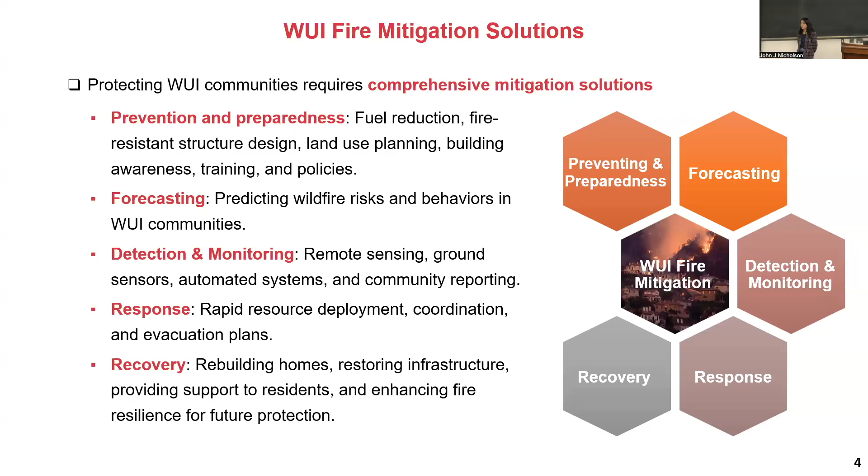While my research is focused, because it's a big problem, my research is just a small part of this problem. My research focuses on what physical and environmental factors control ignition and fire spread in dense wildland-urban interface neighborhoods — for example, how a building's features or environmental features make one building more easily ignited or less combustible.

The second part is how we can model, predict, and ultimately prevent structural loss in future wildfire disasters. For example, we study different types of window systems to see which can prevent the window from becoming an opening — once the window breaks, it creates an opening that lets embers enter the building. So we study different window systems to find the best one for wildland-urban interface fire scenarios.

The last part is how we develop the fragility curve for structures in wildland-urban interface communities. The fragility curve basically tells you the level of fire hazard and the probability of a building reaching different damage levels.

We currently develop this fragility curve mainly based on survey data. But survey data has a lot of missing data — for different buildings it's often not complete. So we also leverage simulation and experimental data. That's the three parts of my work: we cover simulation a little, experiments, and most of my work is experiments.

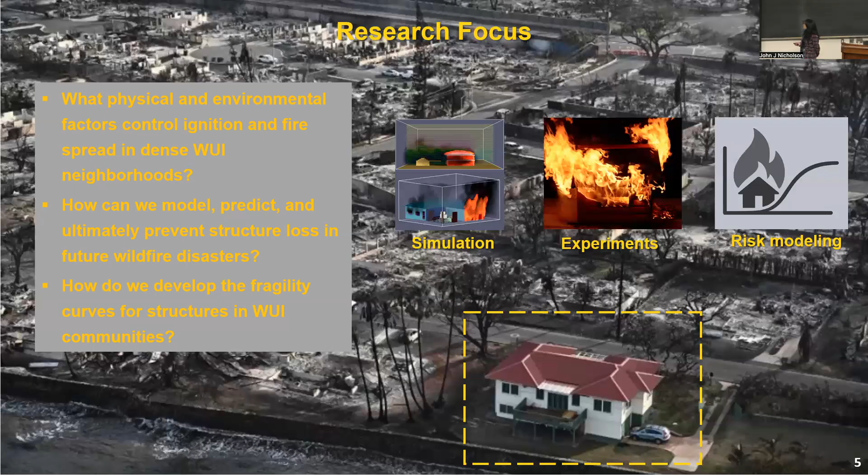The first part of my work involves an NSF project trying to explore the feasibility of using high-resolution CFD-based simulation to model structure burning and inter-structure fire spread. It's high resolution, not high fidelity. The model mainly uses the Fire Dynamics Simulator software, designed by NIST, which is specifically for fire research and is LES and CFD based.

The reason we want to develop this high-resolution model that can simulate a structure burning is because experimental tests of burning one structure are very expensive and time-consuming. We can only study a couple of different scenarios — we cannot use experiments to explore different building configurations.

You have different roof systems, different siding materials, decking materials, window systems. There's no way to do all these types of tests to tell you how to optimize your building design. So we want to use FDS as a tool to see whether it can model structure burning well.

Most current FDS simulations focus on compartment fires or external fires — for example, unenclosed fire. A compartment fire is, say, if I have a fire in the corner of a room, how does the fire spread in this room, from the initial stage to flashover to the decay phase. This is a compartment fire — it doesn't involve the enclosure itself.

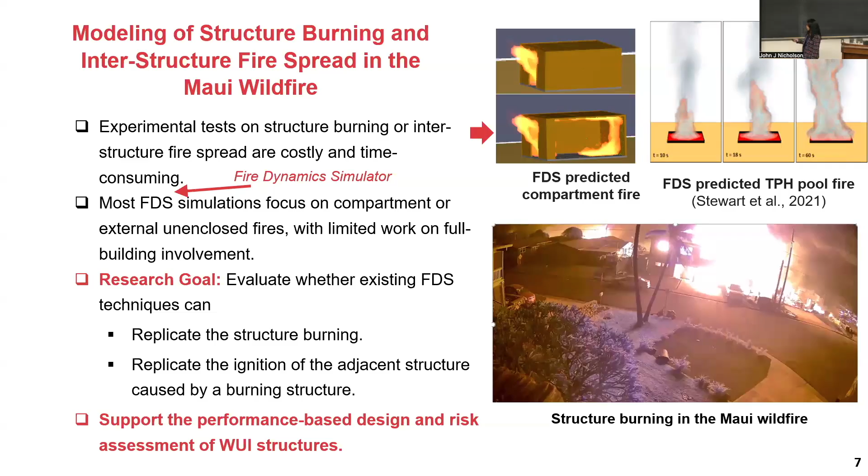So the structure we selected to replicate is the two buildings in the Maui wildfire, and this is a source structure which was burned in the wildfire, and the burning of this structure ignited a one-story building. We selected this neighborhood because we have data from cameras recording the whole burning process of these two buildings, so we can use it to calibrate or evaluate our models.

If you look at the space between the two buildings, there's some trees, some vegetation, and this vegetation impacts a lot the fire spread from the right building to the left building. Also, in the simulation computation domain, we're including another structure, just to account for the potential turbulence caused by this additional structure.

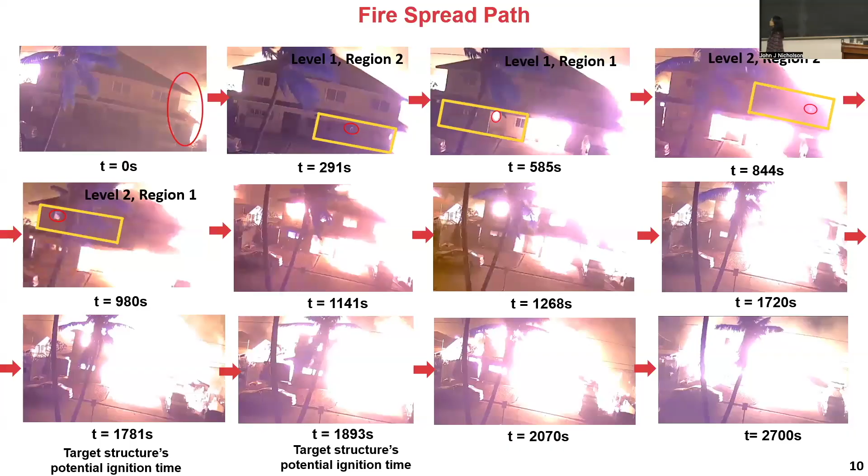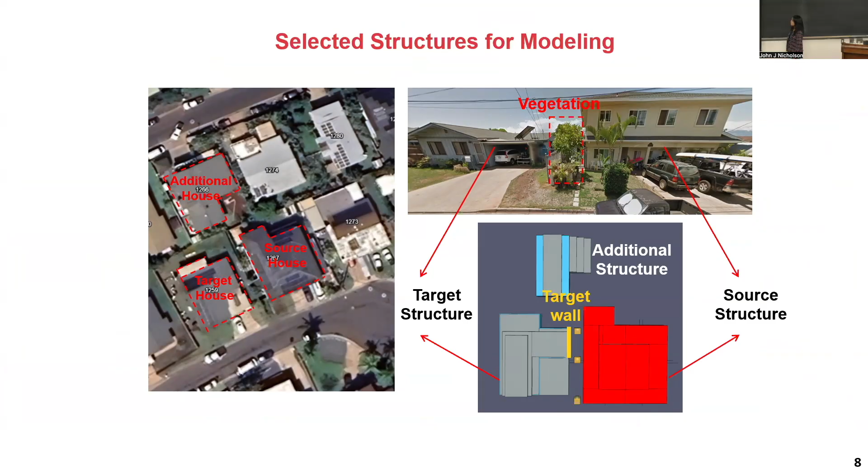The reason we also selected this area is because this building, the one-story building, is ignited by flame impingement rather than ember. Because FDS currently is unable to simulate ember generation, that's why we try to avoid the ember problem in this simulation.

So here, this slide shows you how we model the burning behavior of the source structure. It's a two-story building, the red one, the source structure. In research, we can develop a very high fidelity model. For example, we can develop the model and apply the pyrolysis model for different types of construction material. So we heat the material, it starts the pyrolysis process and emits a lot of combustible gas, then meets the oxygen and the burning happens.

We can simulate this process, but it's very high fidelity and the computation cost is very expensive. That's why we try to simplify the model. Rather than defining the material pyrolysis in detail, we calculate the fire load in each room, and we also count the fire load from the enclosure because the walls are wood walls, so we consider the different fire loads. Then we assign this fire load as a burner to the enclosure of the building, considering the fire in the different stories, and also the fire load in the roof and overhang. Here, in the first story, there's an overhang, so we try to consider the different parts.

So we apply those fire loads as a burner at the surface. For this burner, we define it according to the fire curve calculation, and we can figure out what's the heat release curve. There's some simplified equations to help us.

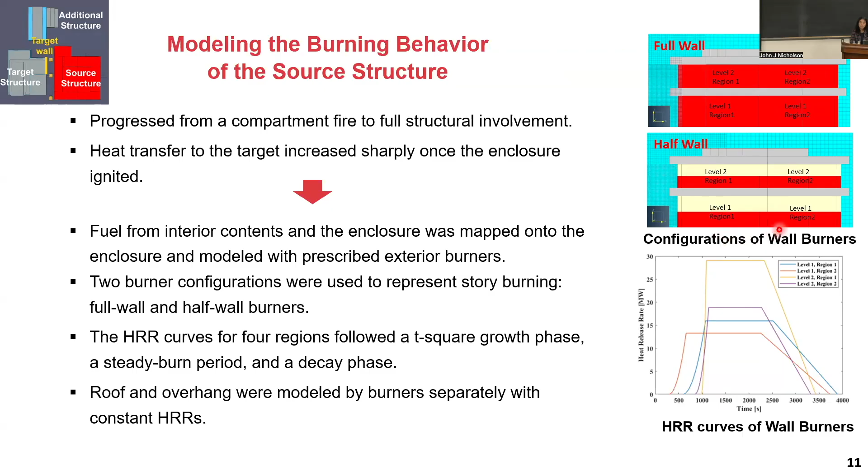So we figure out the different regions, the fire burners, the heat release curve, and then uniformly distribute the fire heat release curve to those enclosures to see how it works. We investigate two different configurations of the burner: in one, we apply the burner to the entire height of each story, and in the other, just half the height of each story.

We also model the vegetation, using a relatively high fidelity model. We consider the material starting from the timber, the wood, and the foliage or leaf, which we treat as wood material. In reality, the tree is a plumeria tree, which is relatively popular in Lahaina. We were unable to find a material pyrolysis model for this type of tree, but in the FDS validation examples there's a Douglas fir pyrolysis model, and usually the pyrolysis model for different materials doesn't differ much.

Maybe the ignition temperature is somewhat different, but we used the Douglas fir's pyrolysis data to define each particle. The tree was modeled as a lot of particles, representing the trunk, branches, and leaves, and then we applied the material pyrolysis model. Once you define the material pyrolysis model, it's basically a chemical reaction, a multiple-step chemical reaction. That's how we modeled the tree.

This model was not developed by ourselves. In the FDS validation examples, they already used a similar technique to model the burning of a couple of trees, validated with their experimental data, and it works very well.

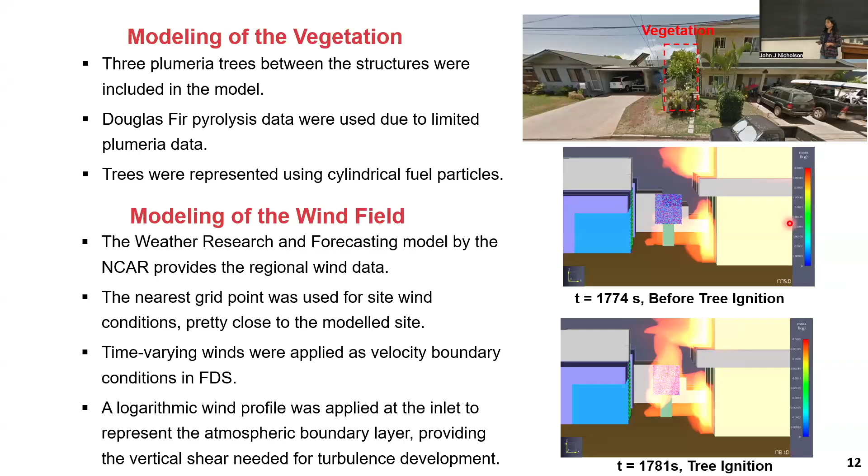So here I show you a couple of comparisons with our simulation. We can simulate those critical events, how the tree burned and how the flame changed direction as the fire developed, but overall the fire size in the model is a little smaller than in the video. Also, the information captured by the camera, because of smoke and other factors, doesn't represent the real fire size, so there's some inconsistency as well.

In this model, for the target structure burning, we stopped the simulation at the point when the target wall was ignited. Once the target wall ignited, we didn't simulate the fire spread within this structure, which is our current work. We basically replicated the burning of this structure to see whether it could ignite the next building. That's the start of inter-structure fire spread.

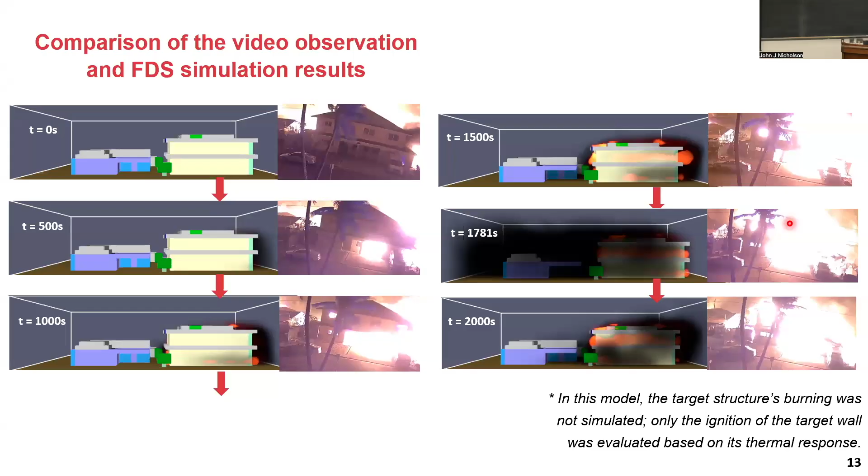There's some ignition time analysis. This slide shows some ignition time compared to the video observation. So the ignition time is, basically we monitor the target wall of the one-story building's surface temperature and incident heat flux. We put a lot of sensors there, calculated the average temperature, and also checked the maximum temperature history.

We get the results from two different types of burner configurations. We found that in most scenarios, the heat flux and temperature from the half-wall burner is higher than the full burner configuration. We also found that the fire started very dramatically, and the heat flux reason is because the fire, even in the burner setup, has a growth phase, a steady phase, and a decay phase.

So during the burning of the source structure, what we see here is the thermal response of the target wall. We found that no matter whether you're using the half-wall or full-wall burner configuration, there's a rapid increase in the surface temperature or incident heat flux at 750 seconds, and the value becomes stabilized starting at 1,100 seconds, then as the fire grows further, it will definitely decay ultimately.

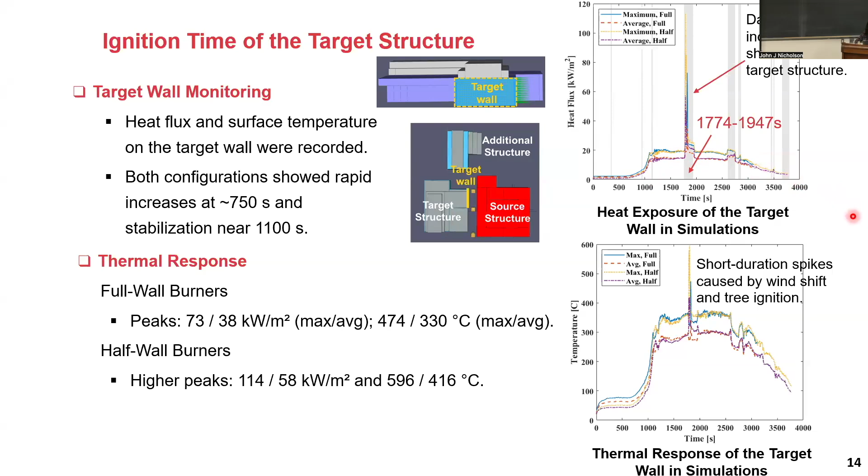So when you try to figure out when the target wall was ignited, you have to have some ignition criteria, which usually is the ignition temperature for the materials. For the one-story building, the target wall here uses plywood. The plywood's ignition temperature varies a lot, and it also depends on whether the ignition is piloted ignition or auto ignition.

So auto ignition, there's no spark there, right? If I was using a candle to ignite the wood, it's called piloted ignition. But if I just heat it and nothing touches the surface, it's called auto ignition. Usually piloted ignition has a relatively low ignition temperature.

For plywood, it ranges from 290 to 390 degrees C, while auto ignition temperature is 475 to 620 degrees C. And if this is a large-scale ignition, we don't know exactly what the ignition temperature is for the wood used for this building. So based on this different ignition temperature, we can identify different predicted ignition timing.

So we basically monitor the temperature of the surface and compare it to the ignition temperature of the material itself, to identify when the ignition of this target wall happens. Because of the large range of the ignition temperature, the predicted ignition time also has a relatively large range.

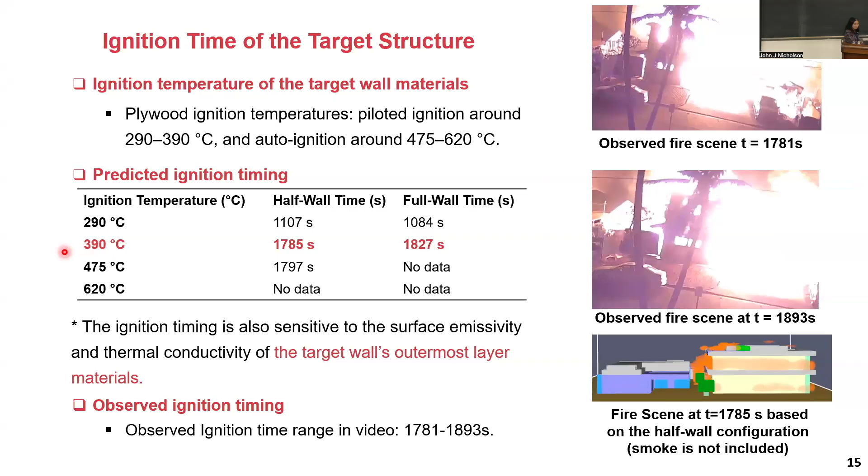So here we also study a little bit about the interaction between wind and vegetation effects. At 1774 seconds, the wind changes its direction, so it directs the flame towards the trees. Then the tree was ignited at 1781 seconds, and the vegetation ignition ultimately caused a very sharp heat flux spike. At this point, the tree was burned, and because the tree is so close to the target wall, the target wall was exposed to a large heat flux. That's the spike. And also, we compare the scenarios.

That's why in the mitigation strategy for wildfire, for your structure, you have to clean the vegetation around your structure, and make sure the space between the structure is enough.

So the problem is, what we found is we compare if the tree is not there versus the scenario with the tree. The blue one is no tree, the orange one is with tree. I compare the different average heat flux and maximum heat flux. What we found is if there's no tree, the spike is relatively small compared to the scenario with the tree. If you compare no tree and with tree, the spike is much smaller if there's no tree.

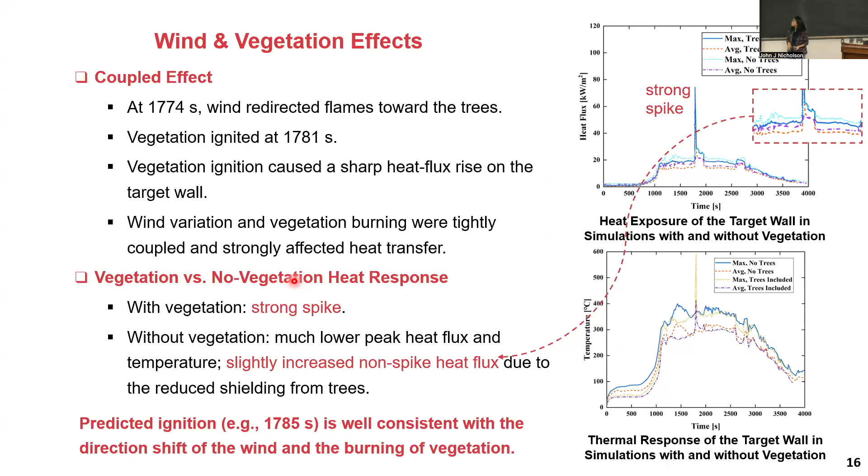So here I'm talking a little bit about the current limitations of the current modeling. If we look at the two-story building burning, we can observe structure collapse during the whole process. When the structure collapses, it changes the fire dynamics significantly and also changes the spread. For example, when part of the structure collapses, it generates a large opening, and this large opening changes the ventilation condition significantly, and also spreads part of the structure.

Let's say if the first story is able to contain the fire, it can prevent the fire spread from one story to another. But if your floor system collapses, once it's collapsed, your compartmentalization has failed, so it accelerates the fire spread.

So current FDS is unable to incorporate structure collapse, because structure collapse is a lot related to mechanics - you need a finite element to simulate how the structure collapses, or figure out a simple way to activate the structure collapse. So this kind of model is unable to capture the structure collapse, and it's also unable to capture the impact of structure collapse on the fire dynamics.

Also, in our simulation, we basically put the burner on the enclosure directly, and all the burning is from the enclosure. But if you look at the video, the fire started as a compartment fire - a room fire first, then spread inside the building, and then involved the whole structure. So FDS is unable to simulate that transition, but you can definitely put your burner inside, putting some burner in your enclosure.

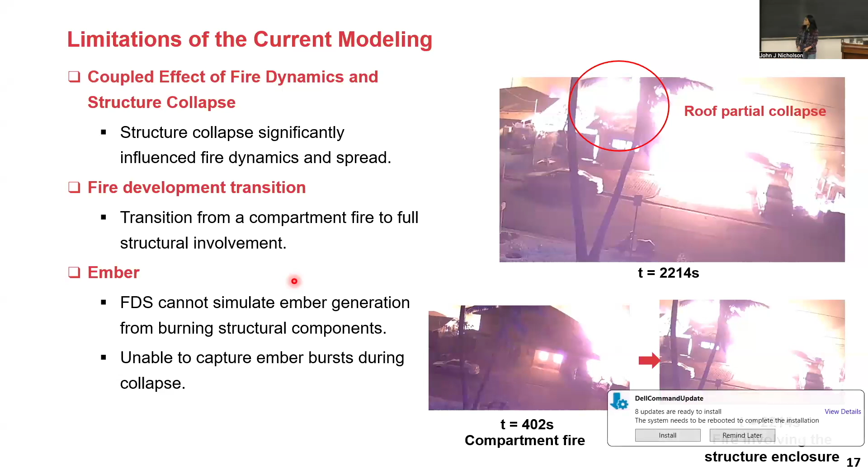So based on our simulation, we found that the reason we stop our simulation at the ignition point is also because we are unable to predict the structure collapse. Once the structure collapses, the fire becomes very intense. Because we're unable to simulate this pattern, we're definitely unable to simulate the fire dynamics. So that's why we designed some small experiments to see what's the fire-induced collapse of timber structure and its impact on fire dynamics. That's the next part I want to introduce.

Here's a brief introduction showing how fire impacts structure collapse. When the temperature increases, it basically causes the wood to char. It loses its strength and stiffness, reducing the load bearing capacity of a timber member, ultimately leading to structure collapse.

Also, the connection of each structure component will also fail. It can be nailed, but the nail is steel - under high temperatures, the nail will also fail. So connection degradation also accelerates the loss of structure integrity. Also, uneven burning creates differential deformation and instability, and failure of a key member triggers load redistribution and progressive collapse.

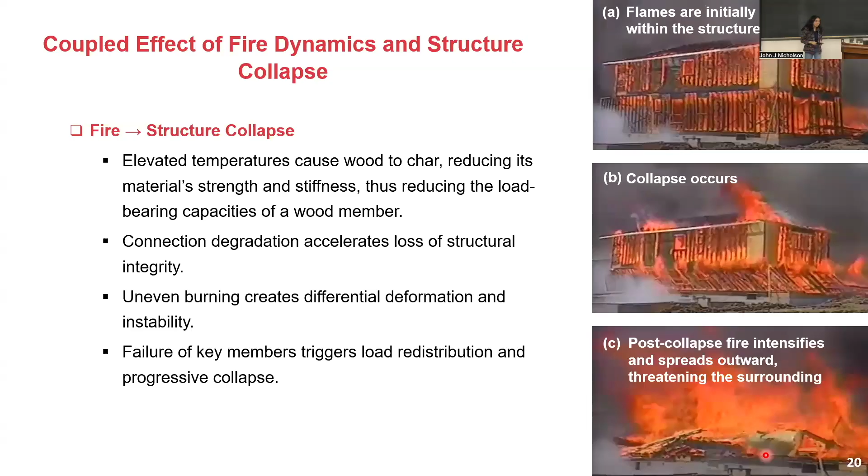The structure collapse also has some impact on fire dynamics. For example, it creates a new opening - part of your wall is failed, then it basically opens a large opening. This increases the oxygen supply and also releases hot gas. It also bridges the compartments.

I have some wall between two rooms, and this wall prevents fire spread from one room to another. Now the wall has collapsed, and it basically accelerates the fire spread, horizontally or vertically. Consider the ceiling failed - it accelerates the fire spread in the vertical direction.

Also it redistributes the fuel, exposing fresh combustible fuel surface to heat flux. Because when the structure component collapses, its location changes, and the burning structure member ignites the unburned surface, exposing fresh combustible material to heat flux. It also produces a sudden airflow surge, which intensifies burning and triggers reflaming.

You may already have some experience with barbecue - when the char is burning and you try to make the burning more intense, you can move the char a little bit so that the burning becomes more intense.

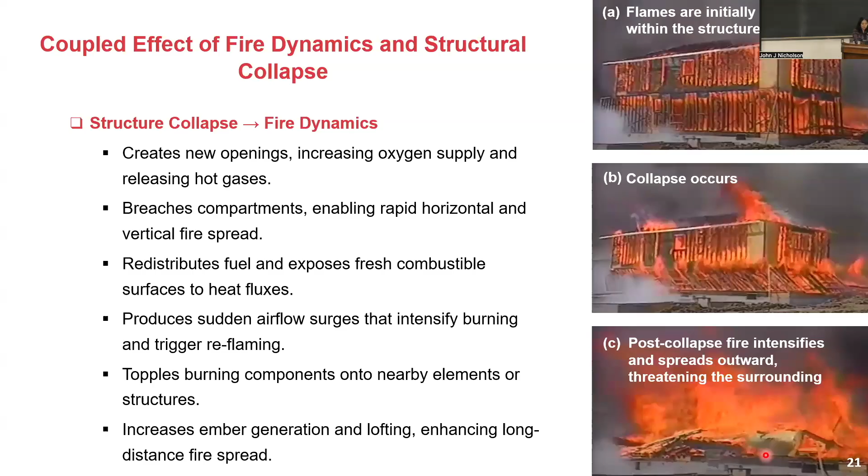This is what we observed from previous fire incidents, and we thought there's some coupled interaction between fire dynamics and structure collapse. Most current research either studies fire dynamics assuming the structure never collapses, or studies how the structure behaves under fire without considering that if the floor system has large deformation downward, it becomes closer to the fire source, making the distance between the structure and the fire source more enclosed.

In current research, the two phenomena are usually studied separately - only fire dynamics, or only how the structure behaves under relatively consistent fire. But in reality, the two have a lot of interaction: fire impacts structural response, and structural collapse impacts fire dynamics. So our experiments try to investigate the collapse behavior of timber structures and fire, and understand how structure collapse influences subsequent fire dynamics.

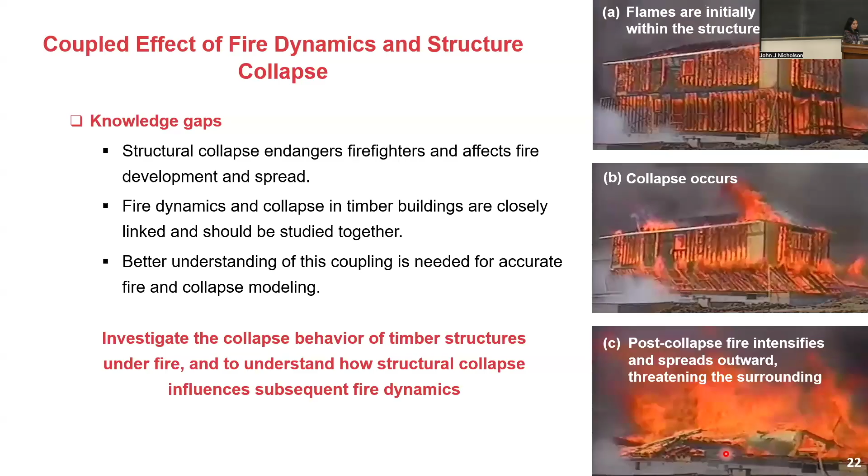We did couple scaled tests. We wanted to design a scaled structure, but my colleague told me designing one has a lot of components, is expensive, and time consuming. Home Depot has a lot of doghouses that give us the perfect size - we wanted to scale down a room by 1 to 3, and the doghouse gave us very similar dimensions we needed, and also a timber structure.

The structure type of a doghouse is different from wood frame construction - wood frame has a lot of small wood studs. But if you look at single family residential buildings, there's always a shed structure next to it used for storage, and that structure type is very close to the doghouse structure.

So we got the doghouse from Home Depot. In the original product, it only had a large opening at the front surface, but we wanted to make it more realistic, more like a building, so we created openings on all the other side walls, the rear wall and side walls. In the test we basically put an external wood crib fire to simulate the structure's behavior under an external fire.

So we have two wood cribs - the outside one simulates vegetation burning, and we also put a wood crib inside the compartment to simulate internal burning, representing fuel load from content like furniture, a couch, and a table. We ignited the fire outside to see how it spread from outside to inside, and put the wood crib at different locations to see how it changes the spread mechanism - that's the goal.

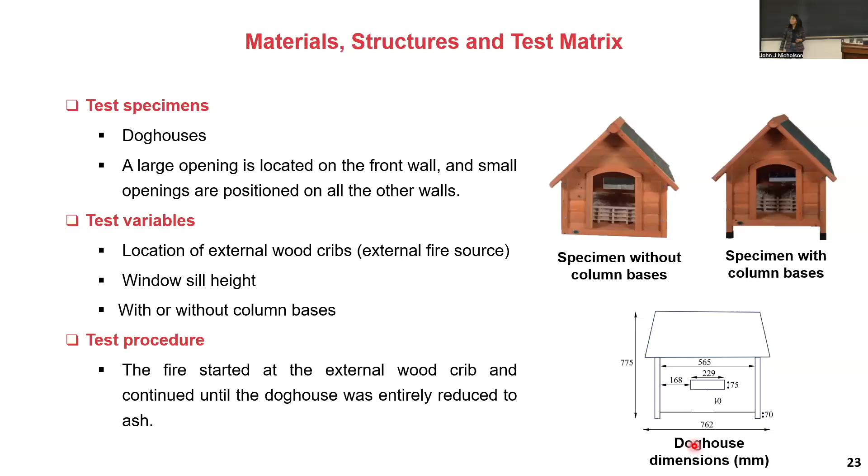This is the test setup in our burning room, and this is the test matrix. We used cameras to record fire development from different angles, and a load cell to measure mass loss, from which we can calculate heat release rate. Our burning room also has a hood that captures all the burning products, allowing us to calculate the heat release.

The problem is the fire for this one is we have two hoods. One is a 1.5 megawatt fire, which can go up to 5 more megawatts. It's almost a 6 feet by 6 feet compartment fire, a pretty large fire. There's another hood, only 600 kilowatts, relatively small. Our fire size is something in the middle.

Our large hood is unable to capture the heat release directly, so rather than use the hood to help us calculate heat release. We use the load cell to measure the mass loss, so we can calculate the heat release. Once you have mass loss, you multiply by the heat of combustion of the material. Most of the material is pine wood, so you can get the heat release.

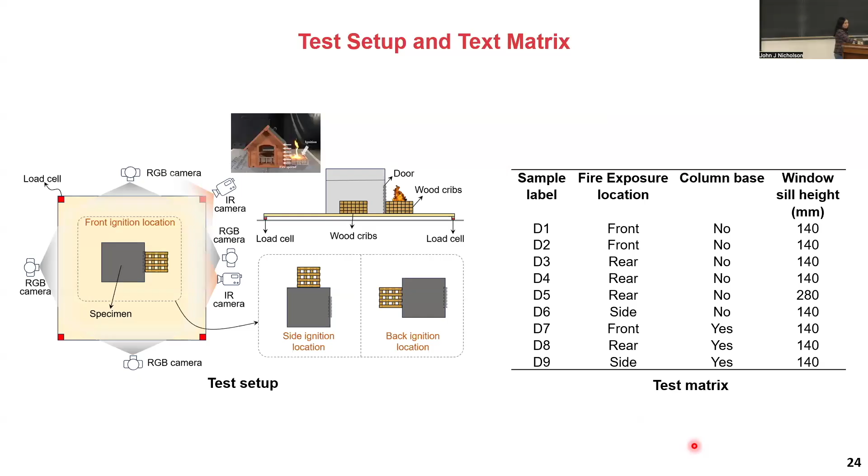So here's a couple of burning videos I can show you. This is the first one. The left one is the front fire exposure, where we put the wood crib in the front walls, and this one is the burning of the wood crib under the rear walls, the back walls. If you can see, the fire spread for the front fire scenario spreads from the external burning and ignites the internal wood crib directly, and then the fire develops very fast in the structure, involving the whole structure, ultimately collapse.

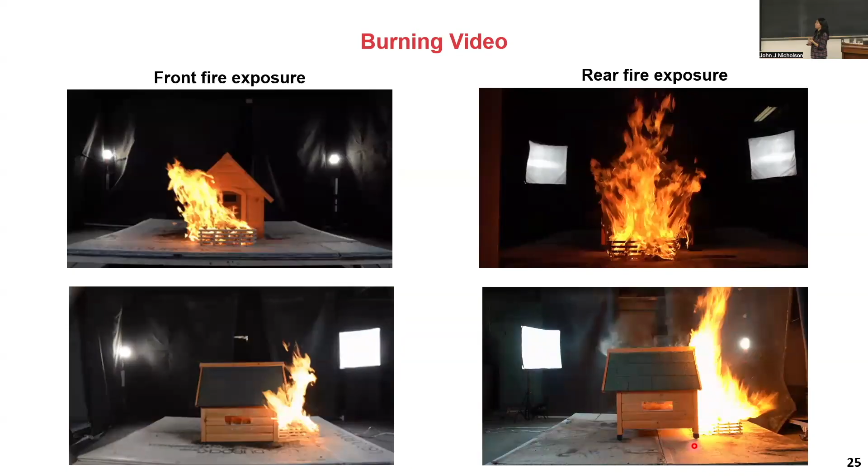But if you look at the rear wall scenario, it's different because the window is relatively small, so the fire was unable to spread directly to the room. It ignited the wall first, and the outside surface of the wall was burned first, then the wall burned through to the inside, and when the wall inside was burned, the burning of the wall ignited the internal wood crib.

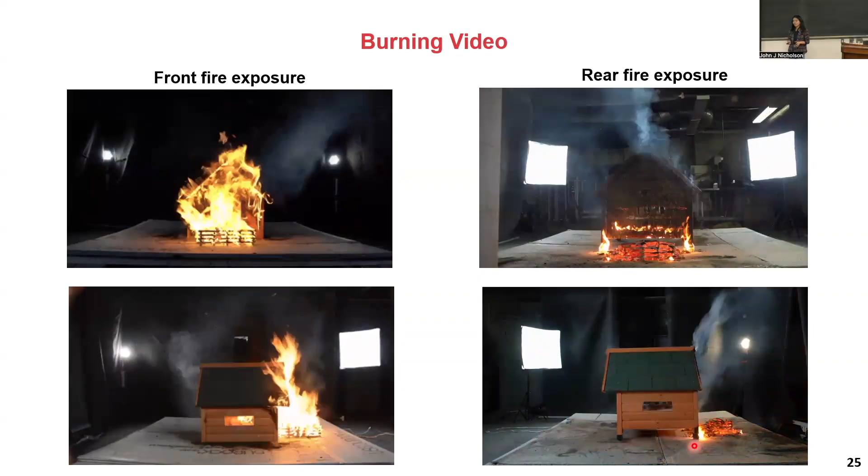So that's why, if your building has a smaller opening, it helps protect your building in fire scenarios. The code requires, even for ventilation vents, you have to use some mesh with certain size requirements, mainly to prevent embers from entering the building. But for openings, if your window has a small size, that also helps a lot. That's the test we did during the past summer.

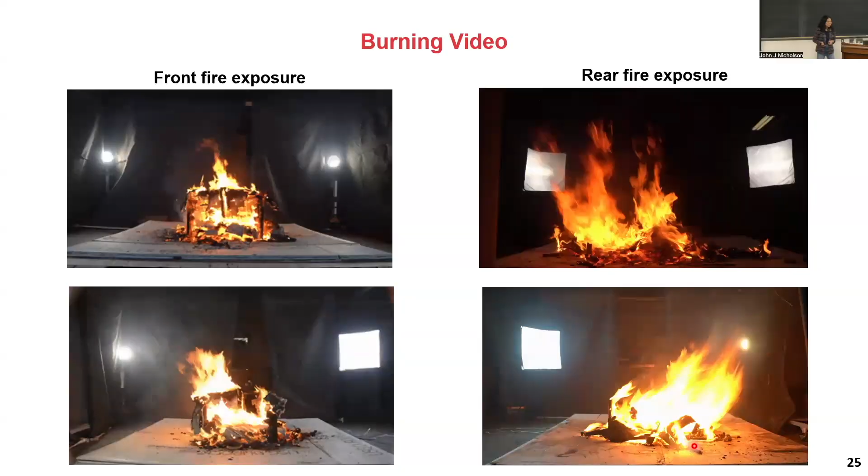So here's basically a summary about the burning process. This is the frontal fire scenario. It's basically the burning of the wood crib that directly ignited the internal wood crib, ultimately involving the burning of the whole structure, and ultimately the structure collapsed.

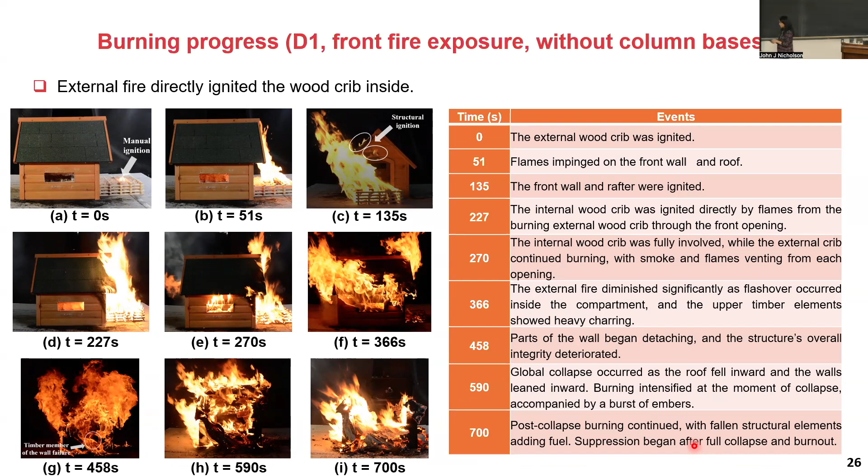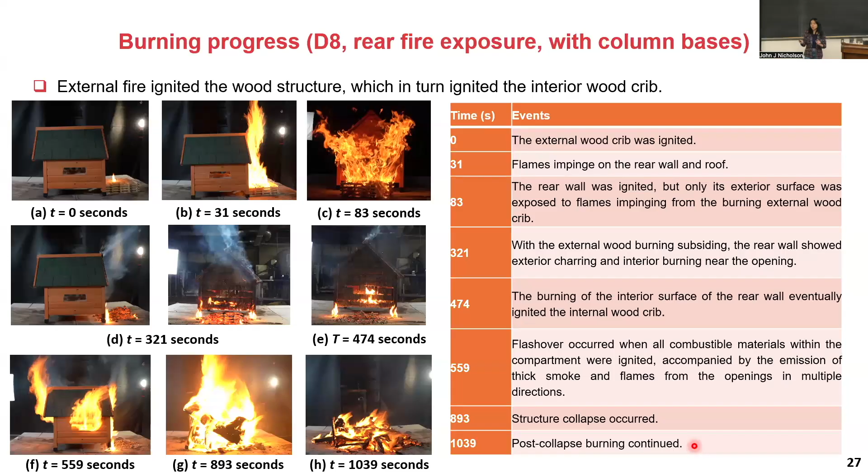So that's the two different burning processes we observed in our scaled-down tests. We also calculated the heat release according to the mass loss, multiplying the mass loss by the heat of combustion of the material, pine wood. It's approximate because part of our roof material is also combustible, but the majority is pine wood, so we consider most of the mass loss comes from the burning of the timber.

We got the heat release curve, which is the blue dashed line, and found two different patterns: sometimes only a single peak, and in another test a double peak. The single peak corresponds to the fire spread where external burning of the wood crib directly ignited the internal wood crib, so the burning is relatively smooth and continuous. That's why you only see a single peak when the internal wood was burned.

The double peak is the scenario when the fire was at the rear wall or side wall, at the window side, where the opening is relatively small, so it's unable to ignite the internal wood crib directly. The external wood crib burns and then almost extinguishes. At this time the wall is already ignited, but the wood takes time to ignite from outside to inside. When the internal wood was burned and the wall's interior surface was burned, it ignited the internal wood crib, leading to another peak. So the single peak and double peak correspond to different fire spread progressions.

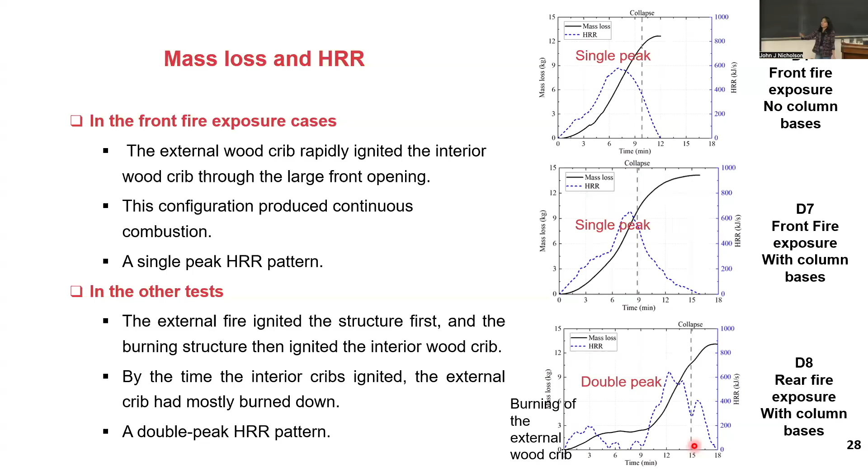Quick interruption. How many slides do you have? I think two or three. Yeah, very fast, just want to make sure I have enough time for it.

We also observed different collapse directions: inward, outward, and lateral collapse. Because our building is pretty symmetric, once the fire spread ignited internally in the crib, it became a compartment fire. The fire mainly comes from the majority damage of the building due to burning of the internal crib. Since our building is pretty symmetrical, that's why most collapse is inward.

In reality, for firefighting or fire spread in a WUI area, inward collapse is a good scenario, because outward collapse occupies the space between two structures, reducing the efficient distance between them and accelerating the fire. We found that most outward spread collapse or lateral spread collapse occurs in one side, and those scenarios correlate with the column base. This is because the column base under fire was damaged non-uniformly—of the four columns, maybe one is more damaged than the others. That's why it leads to collapse in one direction, with some preference in collapse direction.

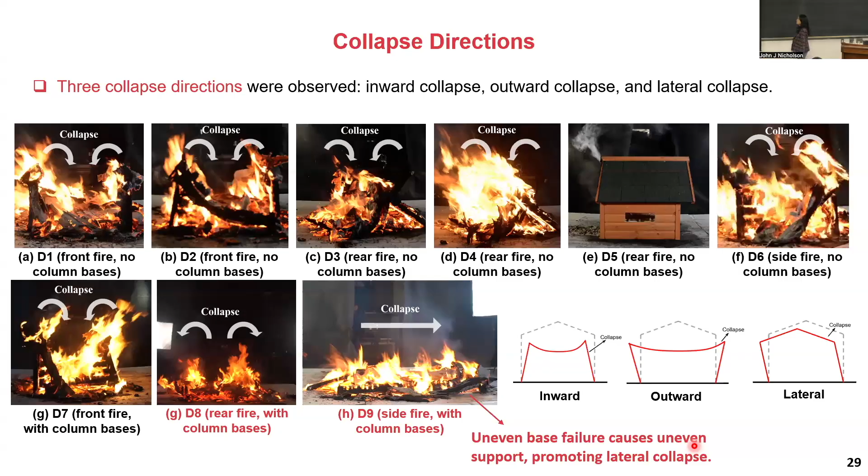Here's the reason why more ember was generated: falling timber fragments release ember as they separate, and once they impact the ground, this fragment generates another burst of ember. The impact will further break up partially burned timber on the ground. It's also the impact load from foreign objects impacting the burning timber on the ground, which can also generate some embers.

Also, the increased ventilation accelerates the ember ignition potential. There's also aerodynamic disturbance, which enhances ember lofting and enhances plume-driven transport, boosting long-range spread. So that's my explanation for why we observe a lot of ember during the collapse procedure.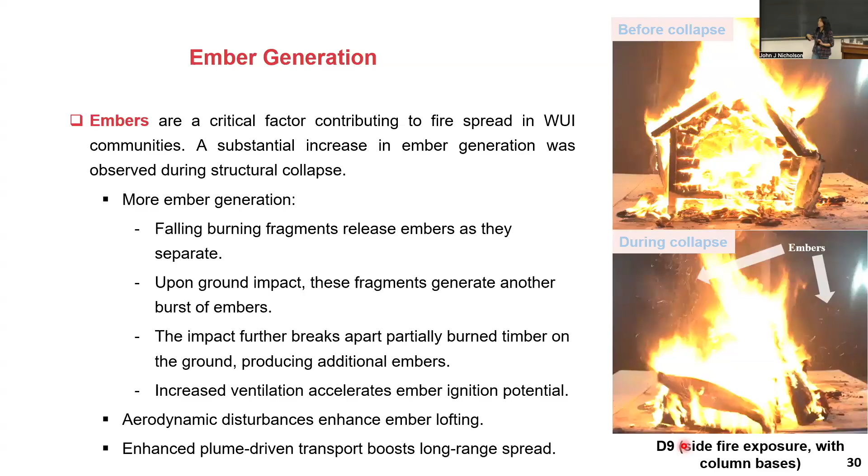Here's a summary—maybe not very brief. The FDS simulation can reproduce interstructure fire spread with the burner configuration, including the correct wind field and burning of vegetation, while ignition remains highly sensitive to the ignition temperature. What's a material's ignition temperature?

Ignition temperature is a material property, along with emissivity and thermal conductivity of the outer-wall material, which means we need relatively accurate material property inputs in the WUI modeling. Further improving simulation accuracy requires accurately capturing the transition from a compartment fire to full enclosure involvement. We also need to include structure collapse and its feedback on fire dynamics, because collapse includes many mechanisms that can intensify burning and ember generation.

We also need to consider how to design a building to make sure the structure is more resistant under fire, so that it's either not collapsing right away or collapsing in a relatively good direction.

When we consider fire spread, we have to consider wind direction shifts, external fire exposure, interior fire development, structure burning, and structural details. All together, these control heat exposure, fire dynamics, collapse behavior, and the subsequent fire spread between structures.

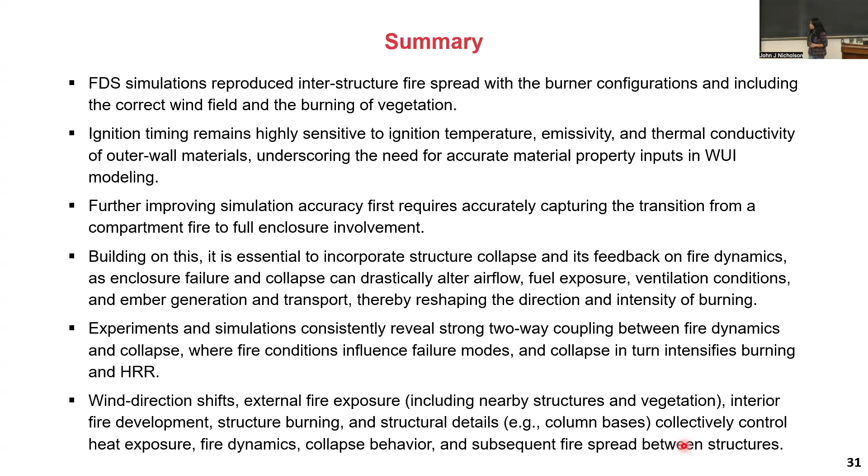This project is part of research funded by an NSF project, and these are my students in my group.